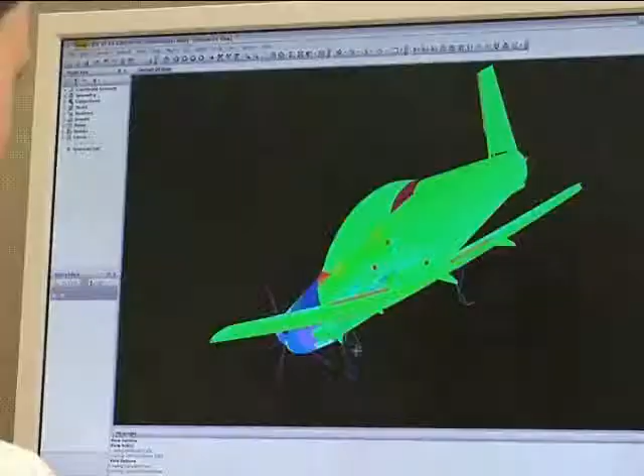The seeds of success at Pilatus Aircraft were planted with one man's vision more than 20 years ago. We started the evaluation of a CAD system in 1986. At that time we found out that UGS was the only solution that was able to provide us a deeper level of integration between the CAD and the CAM system.

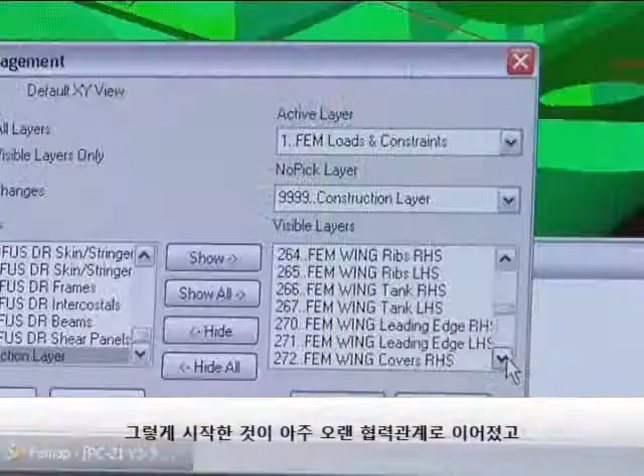This went into a very long partnership and led to the continuous growth of the system, introducing it in parallel with our new developments. The pleasant surprises are really that everything worked seamlessly with each upgrade that we made, and finally led to the introduction of a PDM solution that we call product data management. After finding out more about the PDM system, we realized it was an obvious choice to go in that direction, and therefore we selected Teamcenter as our solution for the new projects.

The partnership between Pilatus and Siemens PLM software is a study in the successful evolution of a product lifecycle management strategy and how PLM helps transform processes.

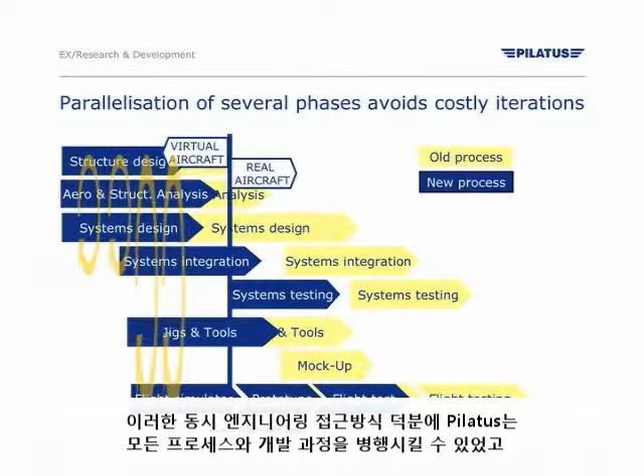The major change which we were able to make over the last 10 years is to really embed concurrent engineering into our design process. Thanks to the concurrent engineering approach, we have been able to parallelize all development process. Therefore, we were able to reduce these long, big iterations and cut them down into very, very small iterations.

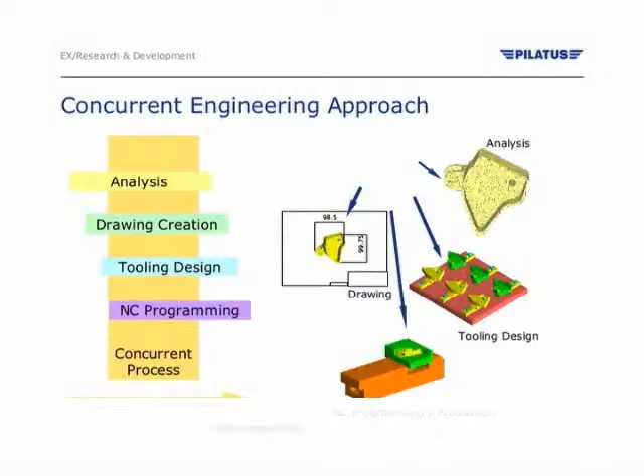We have been able to increase the level of integration, not just with the design office and the manufacturing, but also with the engineering analysis. Therefore, we were able to remove the hardware mock-ups, introducing digital mock-ups and automated testing. The level of depth of data which we could get down to exceeded our expectations.

Uniquely designed to meet the challenges in the highly competitive aircraft industry, Siemens PLM software enables companies like Pilatus to enhance innovation on many levels.

The lesson learned is not to focus on the development phase of a product, but to look at the entire life cycle, cost and processes, like for instance maintenance and overhaul.

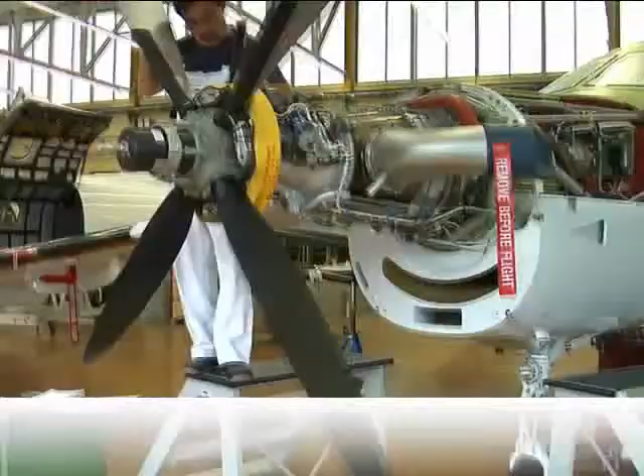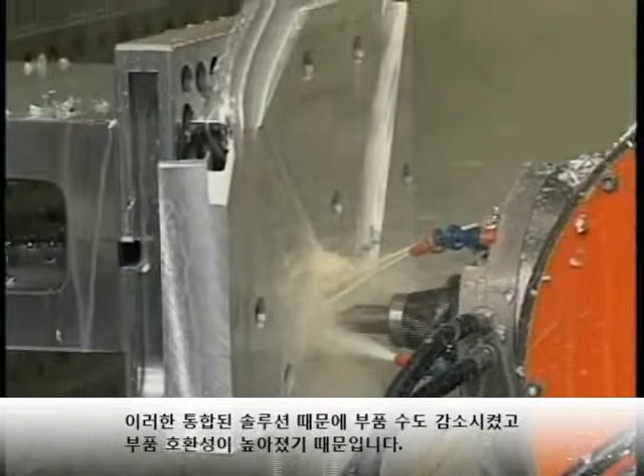Our products are highly regarded for their build quality, and thanks to these integrated solutions we have been able to provide products with reduced part counts, a high level of interchangeability.

I cannot imagine today building an aircraft, or any product with the complexity of an aircraft, without using a solid model CAD/CAM system, and combined to that it's essential to have product data management. There is so much data that is provided, conformity and configuration control is absolutely essential.

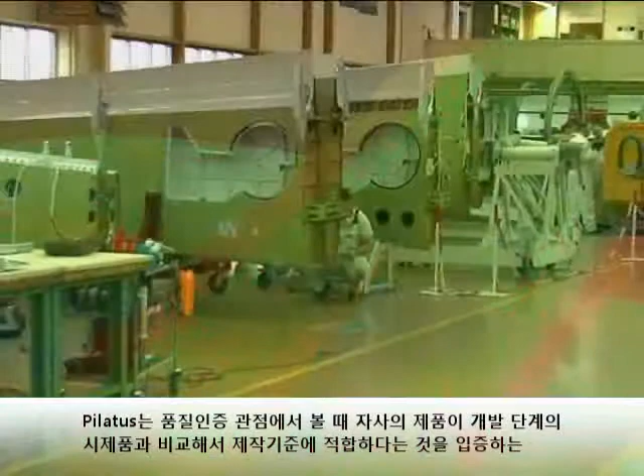From the certification standpoint, we were able, through a tight configuration control and Teamcenter engineering, to provide evidence to all certification authorities about the build standard of our serial production aircraft compared with our prototype in the development phase. This has massively reduced the time to certify the aircraft.

That means providing the right documentation to all authorities. And to do that, they have to be able to go through all the conformance documentation, and without PDM, we would never have been able to achieve that in the time which we did.

An effective PLM strategy and a long-term partnership between Pilatus and Siemens help Pilatus continue to deliver benefits internally and externally. Another part of concurrent engineering is being able to visualize everything at a very early stage.

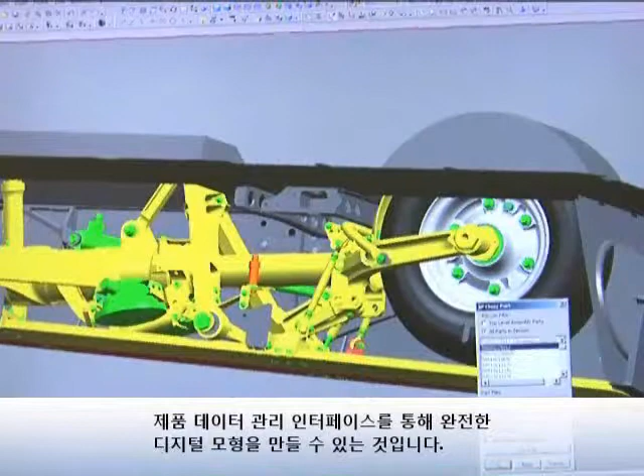You must integrate your suppliers and your customers. Suppliers with CAD systems interfaces and product data management interfaces - it will allow you a full digital mock-up.

We were able to bring in customers very early on in the design cycle. We were able to show them how the cockpit of the PC-21 would look years before the actual aircraft flew. We had several meetings with major air forces during the development phase.

These air forces could enter their requirements into the preliminary design phase, and we were able to introduce them into these expanded IPTs and make sure that they were happy with the solution. And they were able to recommend improvements, and we took those on board and realized them.

The technology we use today has significantly reduced the development cycle, and also has improved the cost of ownership to our operators. But it's also reduced the development cost as well. Our customers have benefited from the integration of these PLM solutions through a reduced lifecycle cost.

Executives at Pilatus plan to build on their successes, follow the signs of innovation, and continue to evolve their process and products to adjust to the changing marketplace and to meet their customers' changing needs.